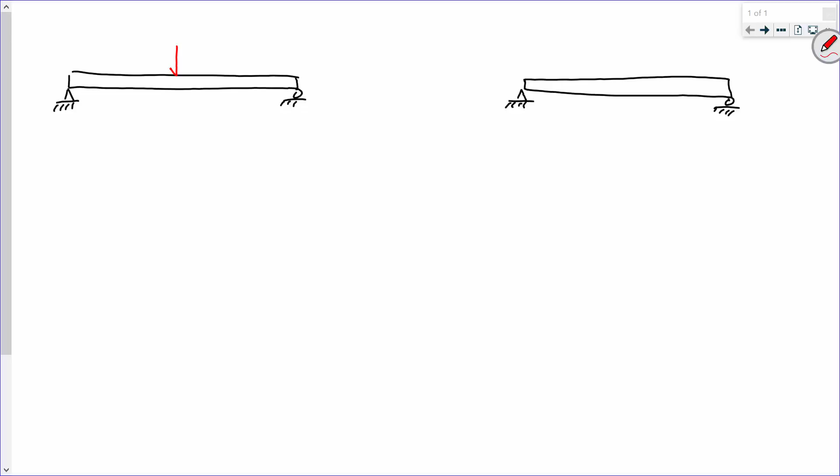Now I'm going to do this really basically. Okay, so I'm going to look at 2 different beams. Now this has nothing to do with the specific homework assignment, but I just want to make a point. All right, so I got a beam over here, I got a beam over here. All right, now here's what we've got. Okay, now let's say we have, let's make up some numbers. Okay, let's say we have a 40 kip load.

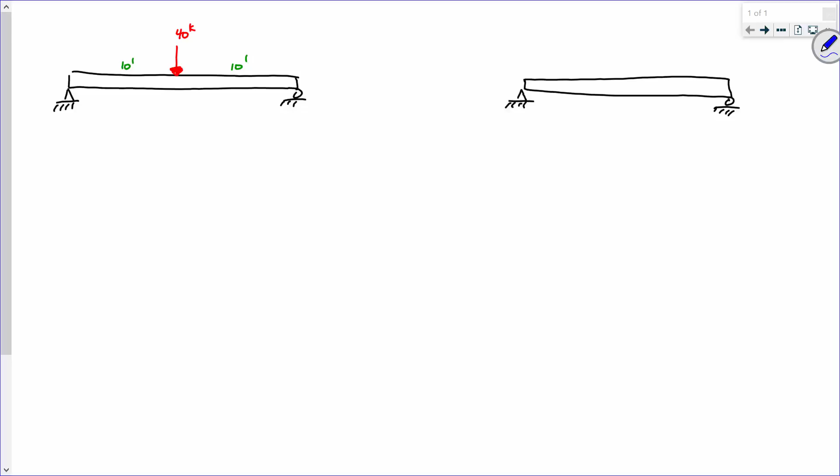We're going off, we're getting a handle on this conceptually. All right, let's say we have a 40 kip load at midspan. Okay, now let's put some dimensions on this. Let's say that this is 10 feet and this is 10 feet. Okay, so help me out with this, what are the reactions over here? 20 kips and 20 kips, right?

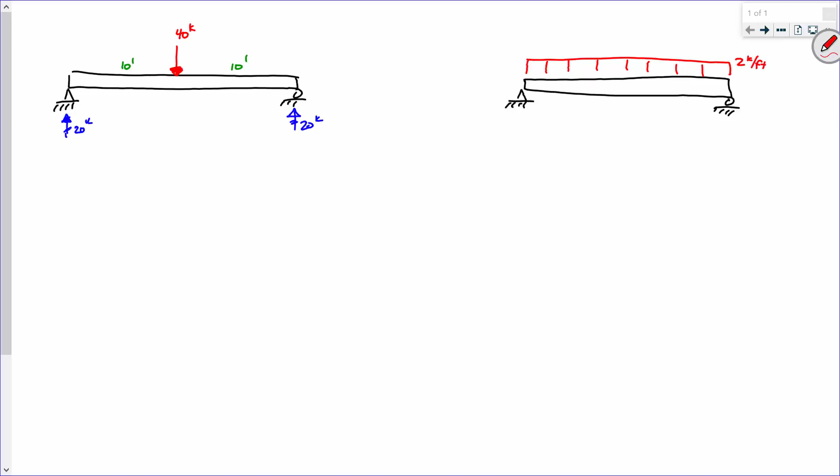Simple, right? Now what a lot of people are doing on the homework assignment is they're saying, well that's not 40 kips. Well it's 40 kips, but it's over 20 feet, so why don't we turn that into 2 kips per foot? And a lot of people are doing that, they're saying 2 kips per foot. And I think probably the logic is that if that distance is 20 feet, that's 2 kips per foot over 20 foot, so we've got 40 kips, right? And a lot of people are thinking, well that's the same beam, right?

Well my response to that is no, no it is not. No, in all honesty, it's not statically equivalent. Okay, and here's why. Let's take a look at the beam on the left. Okay, so first thing that we would do is draw a shear diagram, right?

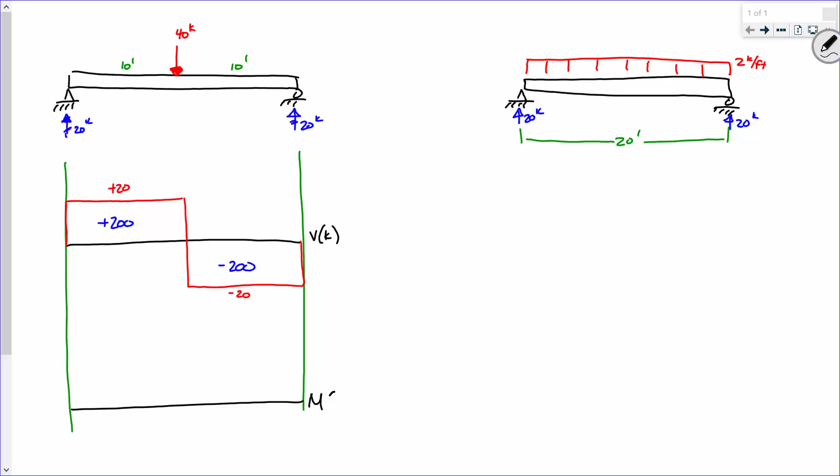So we would say, all right, let's go up 20, no change. Go down 40, so we're at negative 20. Go over and go up, so this is positive 20, this is minus 20. Everybody okay with that? That's the shear diagram. So the area under the curve, that is positive 200, that's minus 200. So the moment diagram looks like this: it goes up, and it goes down, and this is 200. Is everybody okay with that?

Okay, now here's what everybody's, I guess, having an issue with. They're looking at the two beams on the left and right, and they're thinking well they're the same. And in terms of the reactions, yeah they are, but for moments, not even close.

Okay, and here's why. Let's look at the shear diagram over here. Okay, so the shear diagram, I go up 20, but now I'm going down like that, right? So this is positive 20, and this is minus 20. So what's the area under this curve? Well it's 20 times 10, which is 200, divided by 2, that's 100, minus 100. So when I draw the moment diagram, it's different.

It looks like that, and it only goes up to 100. So my point is that if you take this and turn it into this, you are going to be significantly under-predicting the amount of moment, and incorrectly so. Now, that may not directly answer your question on homework 4, but here's what I'll say. Does this make sense, what I've got here? Okay, can I move on to the next panel to try and give you a little bit of clarity?

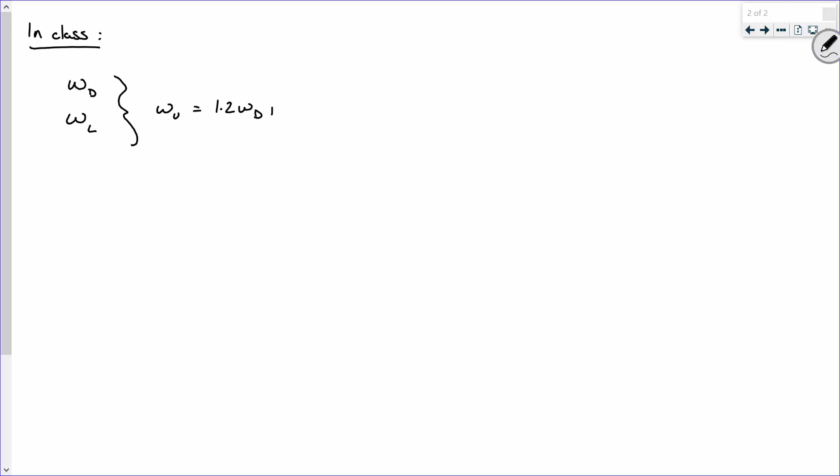So here's what we did in class. We would have a dead load and a live load, and then we said WU is 1.2 times the dead load plus 1.6 times the live load, and then MU is WUL squared over 8. That's what we did in class, right? Now let's be clear, the goal was to determine that. As long as we followed principles of statics and got MU, we were happy.

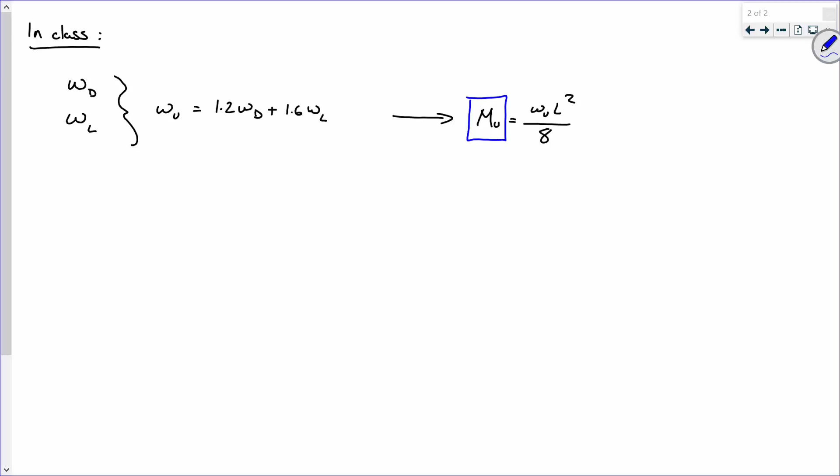Here's what I propose you could have also done, not only in class but on the homework as well. What if you say, I've got a dead load. Let's take that dead load and say the moment due to the dead load is, let's say it's simply supported, so it's WD L squared over 8.

And then down here we've got maybe something like some point loads instead of a distributed load. Take those point loads and however you need to do it—I'm being a little fast and loose with that because you all should be able to determine the bending moment in a beam due to some point loads, since you have the guides I provided, and you did structural analysis last semester, so you should be able to draw a moment diagram. You should be able to take that and compute some live load moment, and I'll let you all figure out what that is. But why don't you take these two and do this?

And just calculate MU that way. Treat each of them separately. Now let's be clear, you could have taken this approach and applied it up here, and it would have worked just fine. I could take the dead load and do moment due to dead load is WL squared over 8, and moment due to live load is WL squared over 8, then factor those, and it would have been the same answer.

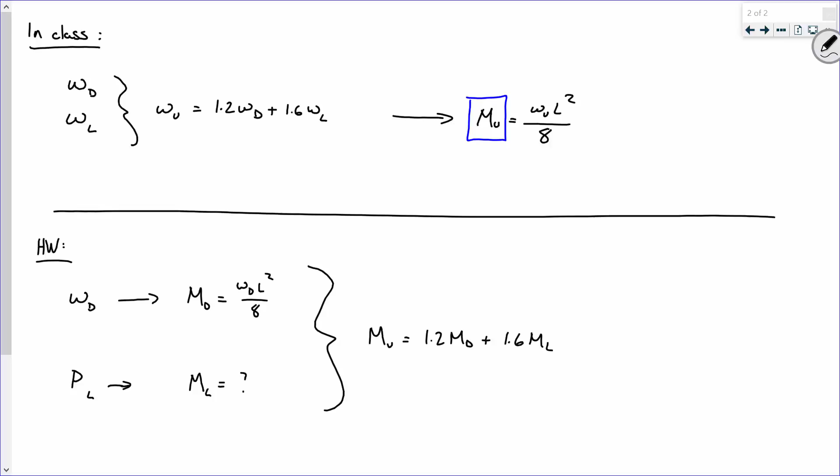You're more than welcome to. But we learned this on, I think it was homework 2. Those figures are fine, and there's nothing wrong with using them, but the thing you have to be aware of is this. Let me go back to this case. Now let's say, for instance, that over here on the right, this is my dead load, and over here on the left, this is my live load.

So these are two different cases of loading. Be clear, I cannot take the live load and turn it into another distributed load because it won't work out. But let me answer it—I think it's more clearly answerable on this. This one on the right is case 1 or figure 1, right? Which one's this over here? Figure what?

Okay, figure 1, where is maximum moment? At the midspan, right here in the middle, like 10 feet away. Okay, over here, where is maximum moment? Midspan. Okay, let me be clear on this.

I can take WL squared over 8 and PL over 4 and directly add them because they're at the same spot on the beam.

So to answer your question, my question to you would be, I would respond by asking this: on figure 9, is maximum moment also at midspan? Is it? It's not? Well, you tell me.

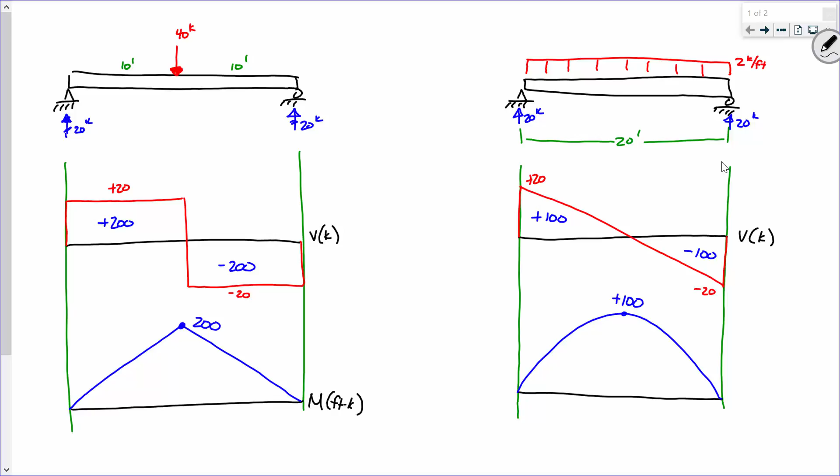Now, the answer is C in that scenario because it was right. Well, so did I.

You realize I haven't made the exam yet, right? So to heck with the FE exam, you have a celebration in here on Friday. So yeah, I'm going to remember that. It's his fault, everybody, right there, it's his fault.

Does everybody have any other questions on the homework? If you haven't started it, it's going to be a long assignment. There's a number of people in here that have already started to chip away at it, and I think they'll tell you, if you haven't even started it, it's going to be long. Am I right? So, monsters and Red Bulls are wonderful things. I guess that's all I'll say on that one.

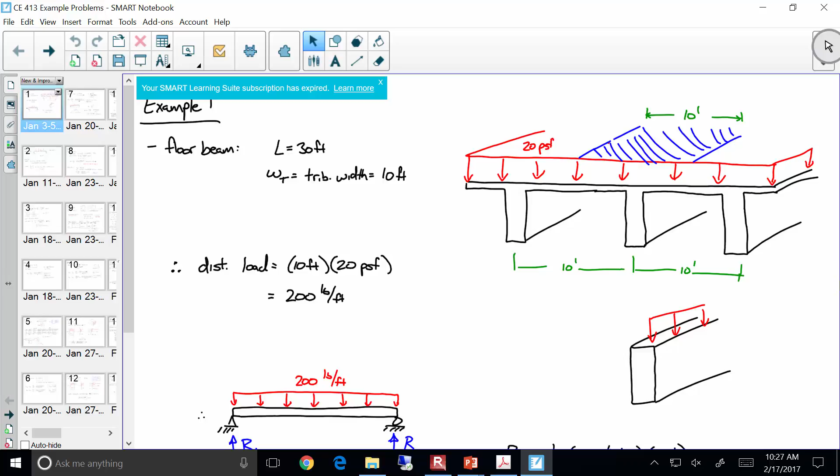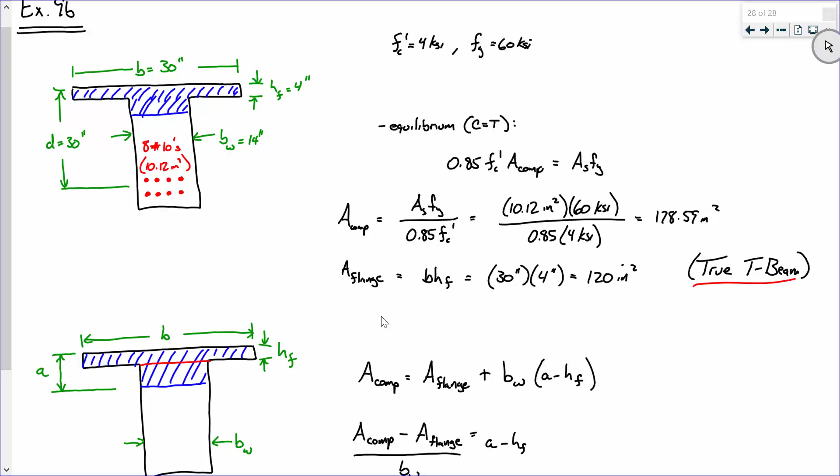So we derived a nifty little expression to compute the distance A, which might be worth starring or putting in your notes, or putting on a formula sheet, especially for homework, just so you have that handy. But ultimately, we got an A distance of 8.185.

So that should, if you think about it, verify our previous calcs. We got an A distance that was 8.185, and that A distance is larger, and this is important, than H sub F, because H sub F was the flange thickness, and that's only 4 inches. So the fact that we got an A distance larger than 4 inches validates what we did earlier. Does that make sense?

Now, in terms of moment capacity, this is going to be a little interesting, because think about it, we can do this one of two ways. We can either split this up into simple shapes, or we've got to compute the centroid of this. I'm going to come up with a way of determining moment capacity without doing the centroid. We'll see that as we get into it. Everybody all right with this so far?

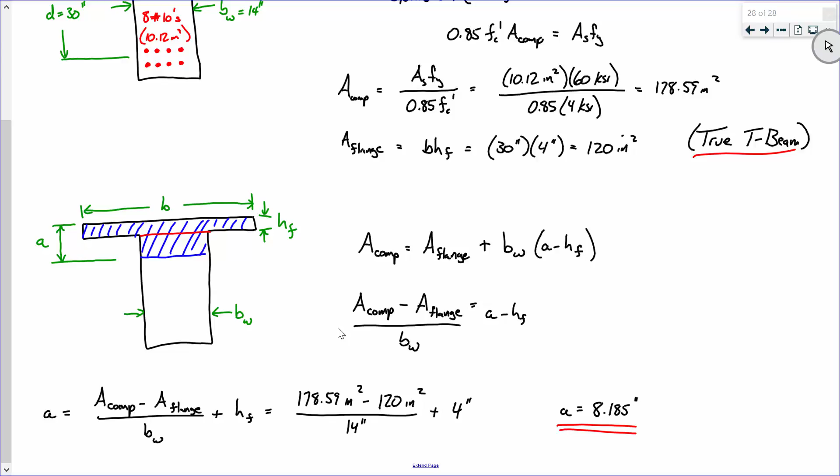Okay, now what I'm going to do right now is this. This is 9B. Okay, we have A, we have our stress block depth A.

Now that we've got that, one of the things that does not change is our computation of phi, our strength reduction factor. So I'm going to go ahead and do that now, just so I've got that out of the way. Remember, to compute phi, we need the strain in the steel, and to get the strain in the steel, we need the neutral axis depth. So I'm going to go ahead and do that now.

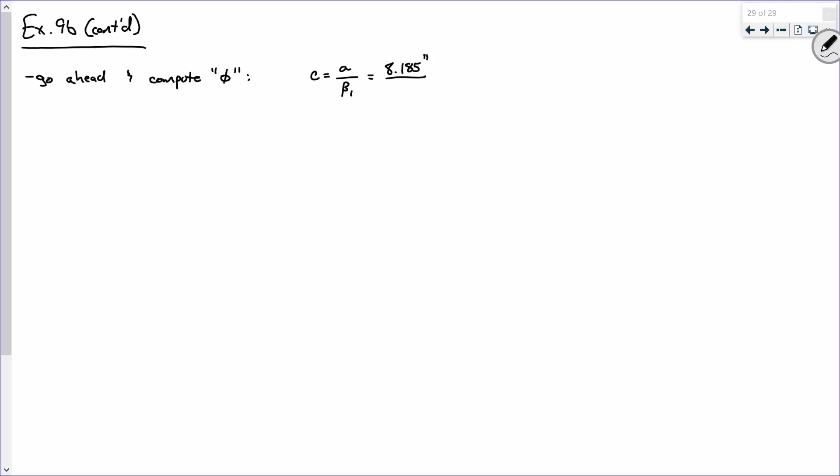Let's go ahead and compute phi. So we need to determine our neutral axis depth, which is just A divided by beta 1, which A is the 8.185 we got earlier. And what is beta 1 for 4 KSI concrete? 0.85. So 0.85, plug and chug, what does that come out to be?

9.63, or maybe 9.629. Just go to 3 decimals, keep it simple. I like to carry this to a few more decimal places because strain values can get kind of small. Now, how do we compute the strain?

There you go. And that doesn't change from T-beams to singly reinforced rectangular beams. The only time that strain calcs get a little funky is later on when we look at doubly reinforced shapes, because we've got to compute the strain not only in the tensile steel, but the strain

in the compression steel as well. Okay, so 0.003 times, what's the D distance for this one? There we go. Minus 9.629.

.00635. So what does that give us now? What's the value that we compare it to for phi?

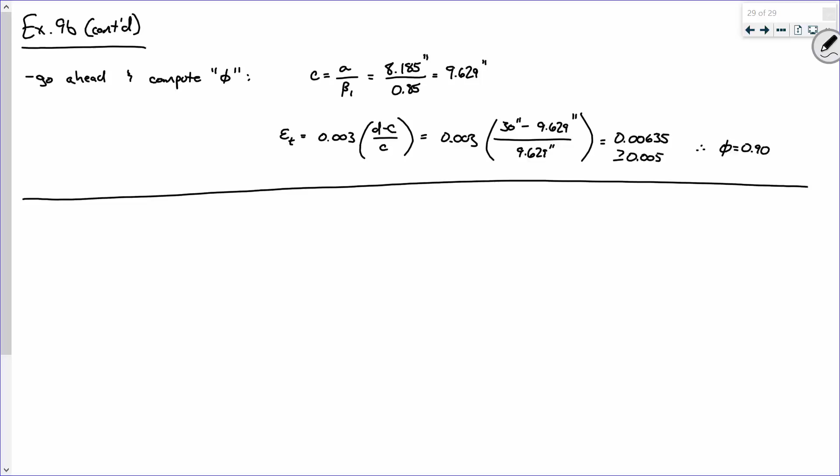All right, now let's look at this nominal moment capacity. Now this is kind of important. When we did nominal moment capacity before, we used a pretty fundamental relationship for moments, right? We said that to compute a moment, just in general, you need two things: you need a force and you need a distance, okay?

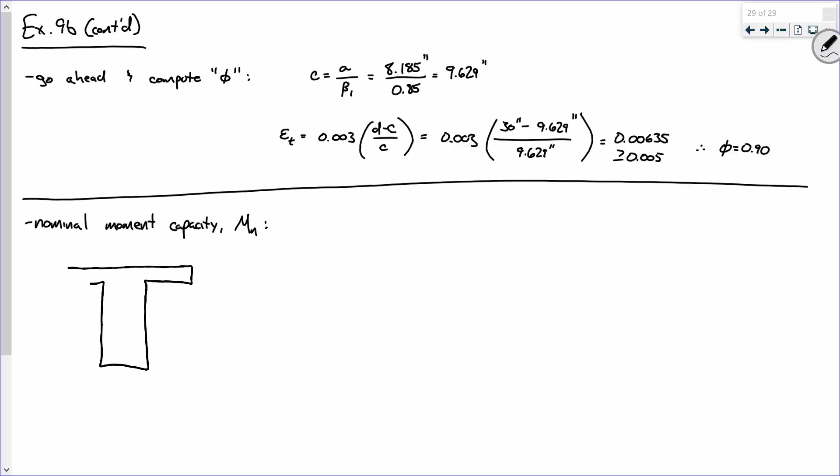So let's look at our beam, okay? So we have a beam that looks something like this. We have a stress block that looks something like this. And we have some steel down here. I don't remember how many bars it is, but it really doesn't matter. All right, sound good? Okay.

Now, when we did our moment capacity, we said that the moment capacity was a force times a moment arm. Now, first off, let's talk about the force. Did it really matter which force that we used before? Why?

Well, we didn't assume them to be equal. We found the distance so that they were equal. So we basically computed our moment based off of this relationship, and it didn't matter which force that we used because they were equal. Now, that was advantageous when we were looking at just a rectangular stress block and steel. We don't have that here. The geometry is a little more complicated. So ultimately, we need to account for the moment generated by this, okay?

So this is how I'm going to handle that, okay? I'm going to say that the moment generated by this is going to be the sum of the following two things. So bear with me.

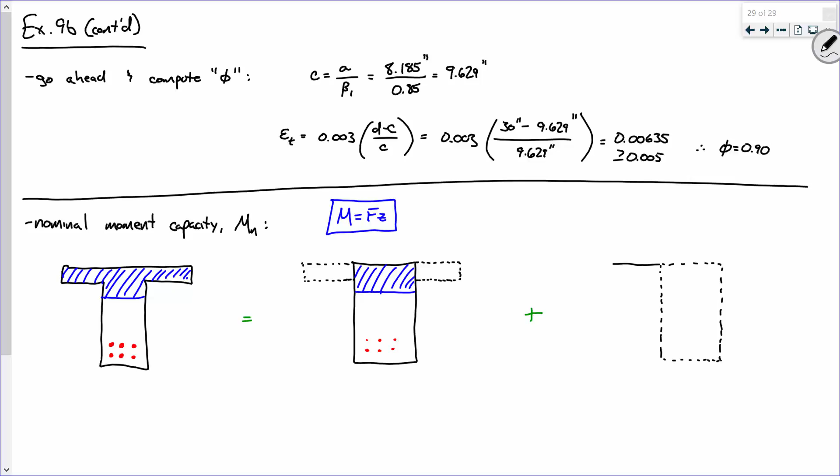So let me draw this out and I'll sort of explain what's going on. And then plus the moment from this. Bear with me. Okay, so I propose that to determine the moment generated by this stress block, it is the moment generated by this plus the moment generated by this. Just split it up into simple shapes. Okay? Everybody all right with that?

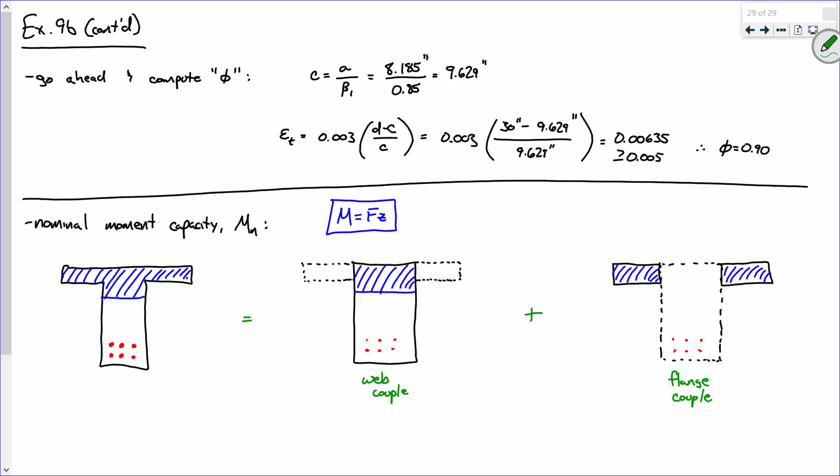Now, I've done this for a very specific reason. I'm going to call this, remember that term force-couple relationship? That's essentially what we're doing. So I'm essentially summing moments when I do this. I'm summing them from the steel. So I'm going to say force times distance, force times distance. I'm going to call this one over here in the middle the web couple. And I'm going to call this the flange couple, all right? Is everybody all right with this terminology?

Okay, now, so for each of these couples, I'm going to need a force, and I'm going to need a moment arm. Okay, so let's start off with the forces. Now let me put some dimensions on this. What is this? Let's look at this. What is this dimension right here? No, okay, yeah, it's 14 inches, but I'm talking about symbolically.

What is it? BW. Then I'm going to try and derive some equations that I can use for other beams down the line. Now, what is this dimension right here? That's A, right? Everybody okay with this? So I want to look at computing the force inside this part right here. Now, is that compression or tension?

Compression, right? So I'm going to call this the compressive force for the web couple. All right, now help me out. First off, what's the area of this web couple right here? What's the area, or that force right there? I mean literally, what's the area? There we go.

ABW. Now what is the stress? Remember, a force is a stress times an area. What's the stress? It's concrete in compression. So what's the stress that we've been using? 0.85 FC prime. Okay, everybody all right with that?

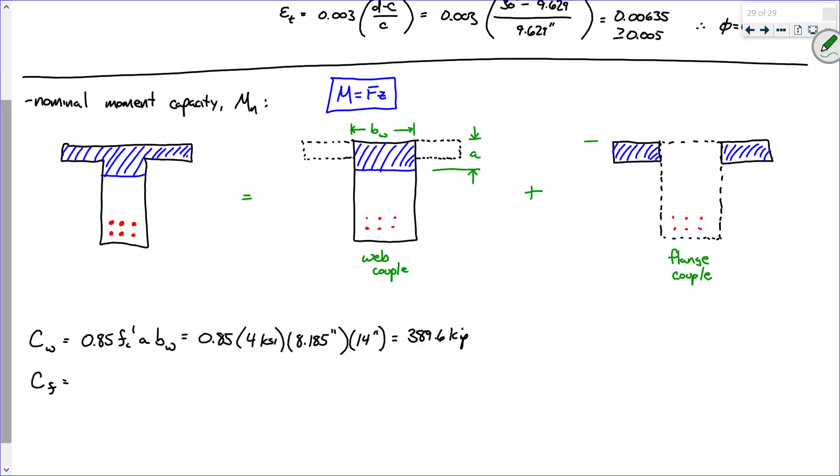Sound good? All right, so likewise we're going to compute a C sub F, a compression force for this flange. All right, now let's look at this. First off, what do we call that thickness? HF. And what do we call, now let's look at this, what do you think that distance is right there? There you go, B minus BW over 2, or 1/2 B minus BW. Everybody all right with that?

So I propose that the compressive force in that flange couple is going to be 0.85 FC prime times the thickness, now watch this, times that distance times 2. So I got a 1/2 and a 2, they're going to cancel out. So I propose it's 0.85 FC prime HF times B minus BW. Does that make sense?

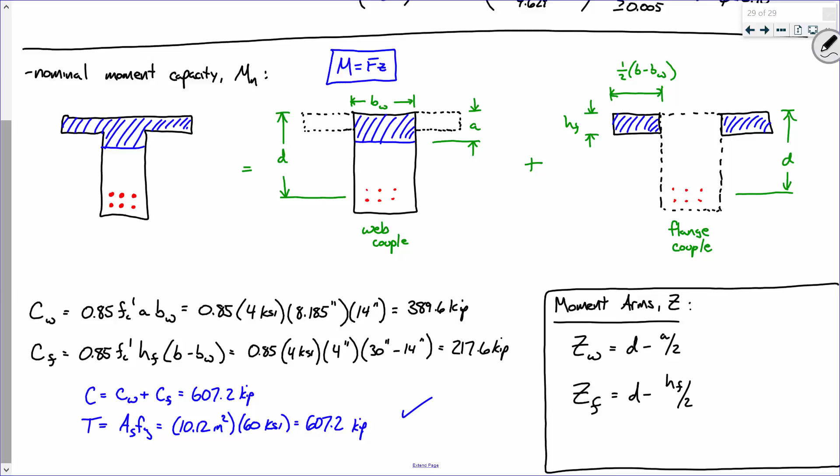Does that make sense? Everybody all right with that? So I propose the following, okay? First off, does everybody have everything here, or do I need to move on to another panel? You got this? Okay.

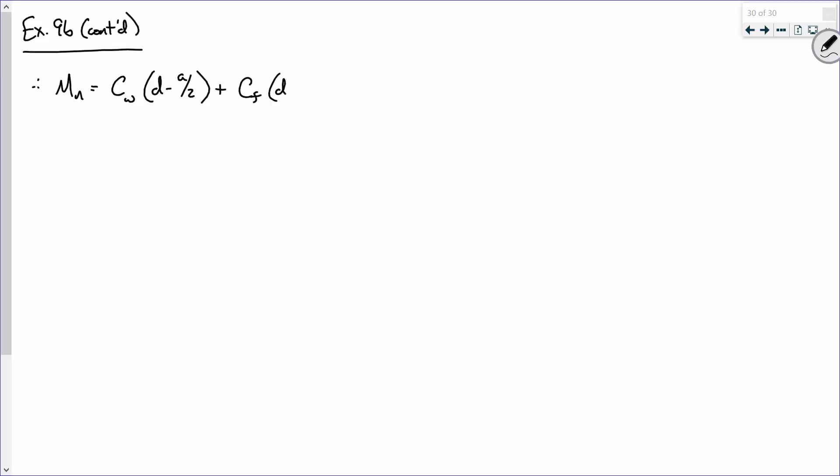I propose that, once I can write this out, Mn is calculated for a true T-beam as follows: CW times D minus A over 2, plus CF times D minus HF over 2. That make sense? Force times moment arm plus force times moment arm. Literally sum of moments, okay? All I'm doing, all right?

What makes it an ultimate capacity is the fact that I'm using literally maximum stresses. I'm using Fy for the steel, 0.85 Fc prime for the concrete. That's what makes it an ultimate capacity. But the actual mechanics of it is just force times distance.

So plug and chug. I've got C sub W, which is what? 389.6. D is what? 30 minus A over 2, which is, what's A? Plus C sub F, which is? And then it's 30 minus 4 over 2. Is that right? 4 over 2.

So what does MN come out to be if you do that calc? First, while some of you are crunching numbers in your calculator, what are the units? Inch kips. We still have kips, we still have inches, so cognizant of that.

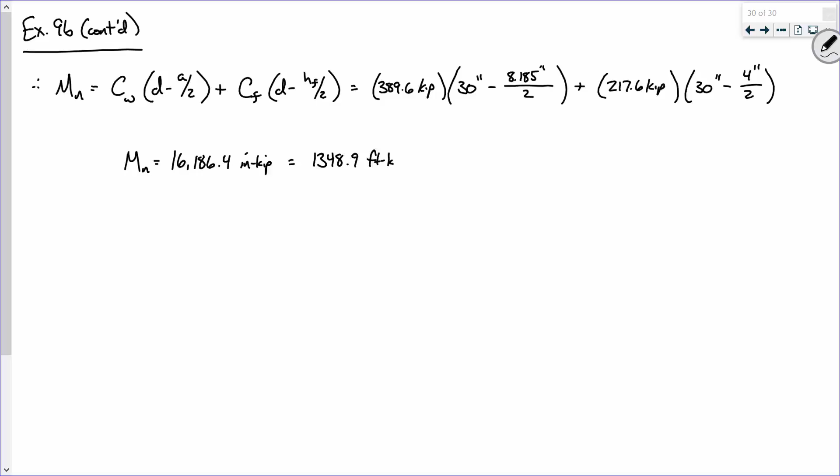16,186.4. Do I have a second on that? Yeah, for inch kips. Okay, so I heard a second. So what would that number be in foot kips? Now, is that the final answer?

There you go. And what is phi? 0.9. That's why we did it earlier. Went ahead and did that. So therefore, phi mn is 0.9 times 1348. Better than that.

Phi mn is what? 1214? 1213.97715. All right, rounded to the tenths place.

Is that an acceptable answer? All right. You're not happy about it? I'm sorry. This could cause a fail and kill a lot of people. This is where Grandma died. If that's the answer that you give in court, well, I didn't like the way Dr. Michelson rounded stuff. So.

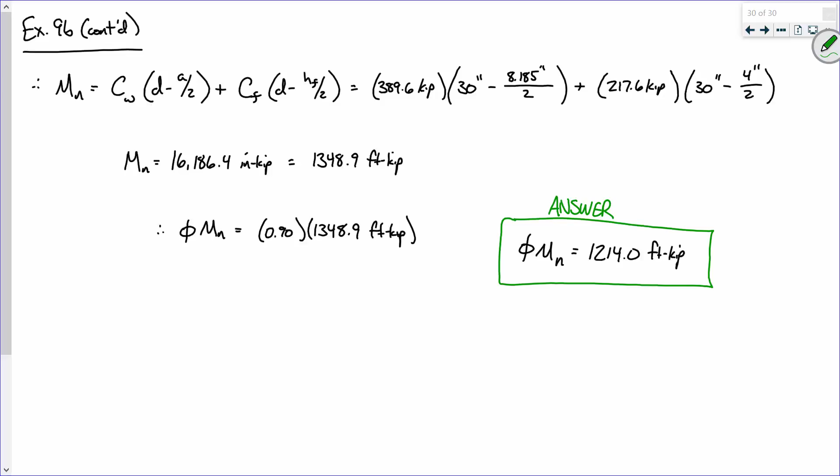Okay, let me show you at least a taste of things to come, and then we will call it. But the idea next is, how do we design a T-beam?

Well, first off, the only two things I'll say about design right now are the following. Number one, design of a T-beam is a lot like the design of a known cross-section. In other words, here's the idea: you can either use pre-manufactured forms so you already know what the size is, or you can design the beam independently, design the slab independently, and then go back to the combination of the beam and the slab and see if you can reduce the amount of rebar, and in many cases you can. So by and large, for the most part, you're going to know what the T-beam looks like, okay?

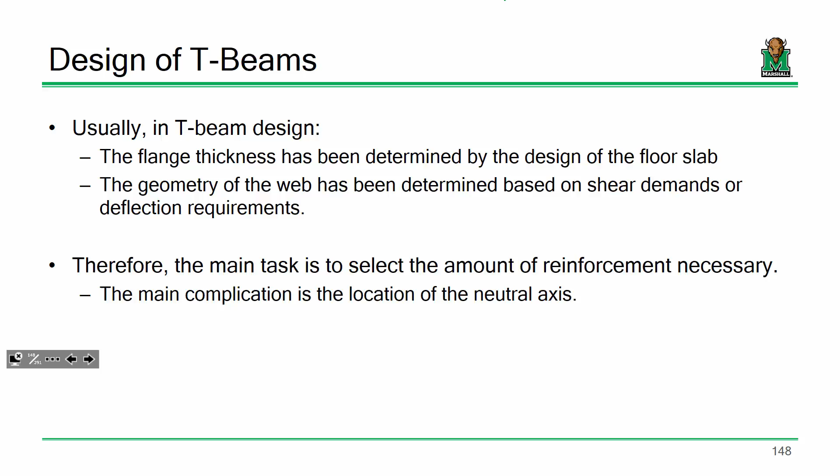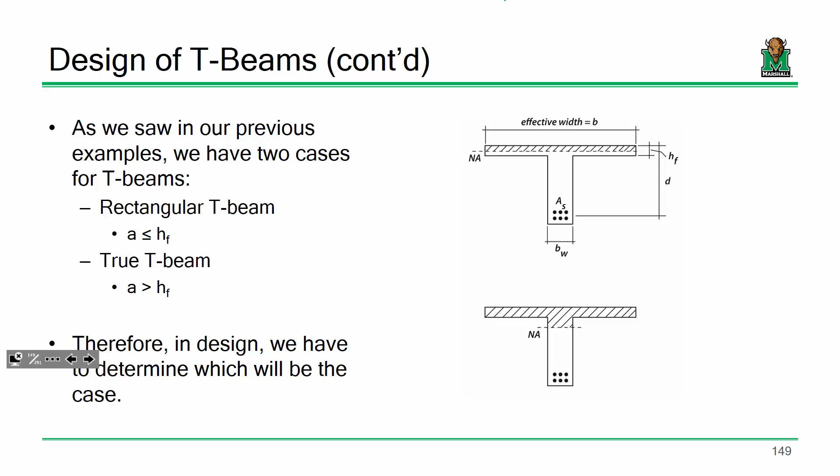So the main task is to determine the amount of reinforcement necessary. And the way that we do that is we have to distinguish between whether or not we are designing a rectangular T-beam or a true T-beam. Now, just to close it, if you are designing a rectangular T-beam, then the design is no different than what we did before, because it is, again, a group of steel and a rectangular stress block. However, if you are designing a true T-beam, it gets a little more complicated, okay?

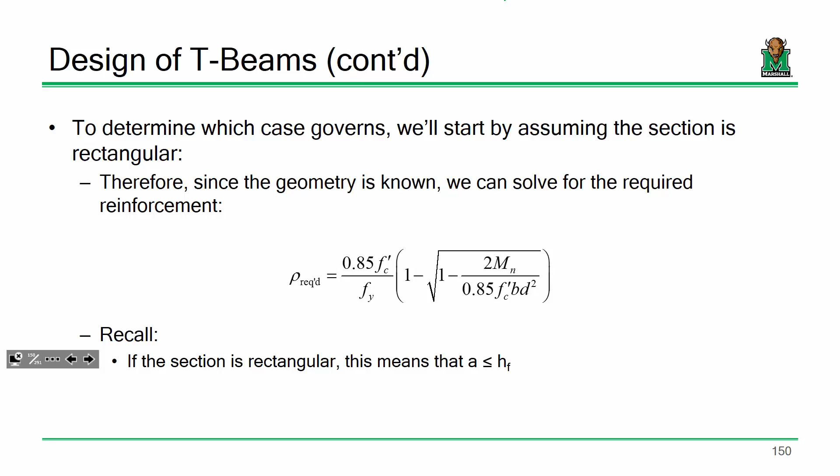What we end up doing for our design procedure is we start off simple. We start off assuming that the beam is rectangular. And if that works, we'll just calculate rho required, and that's it. Calculating rho required will then take that, back calculate the depth of our stress block to see whether or not our assumption was true. If it is, hey, it's rectangular.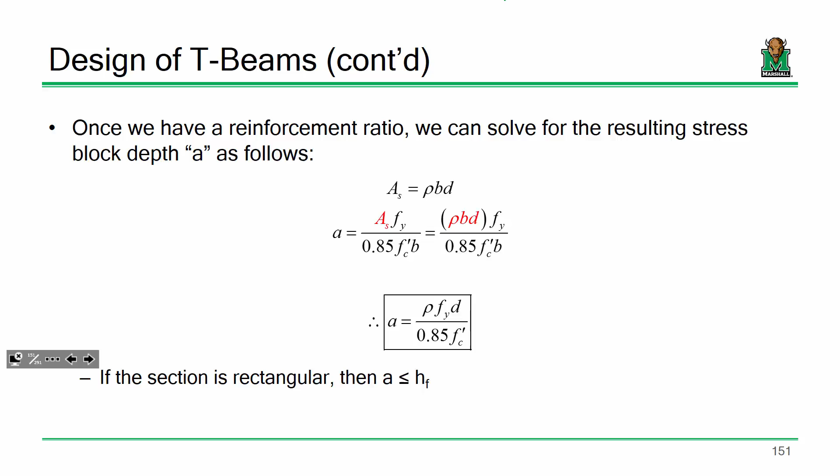If not, what we end up doing is this: we go back to this split that we made where we said, okay, we've got a flange couple and a web couple, and we literally treat each of them as if they're an independent beam. We figure out how much steel we need for this, how much steel we need for this, add it up, and then that's the amount of steel that we pick. That's basically it. It's a longer step-by-step process, but it really requires you to have a good understanding of the basics of 0.85 FC prime and As Fy. And if you've got that, you're good.

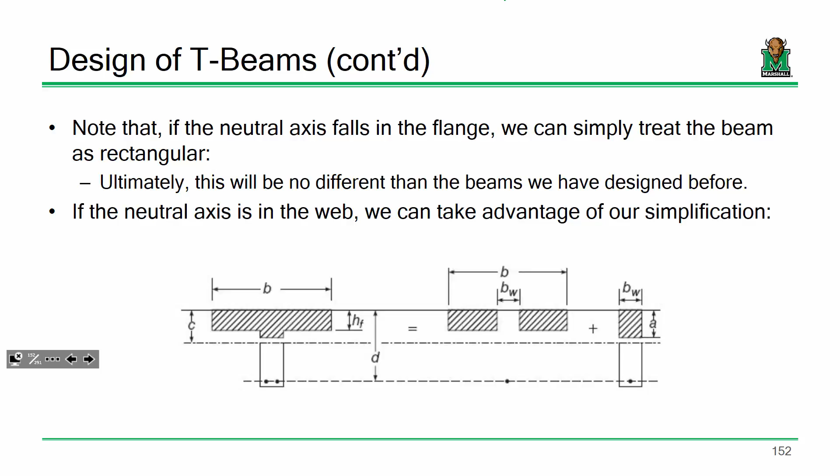Should I maybe move my car after the steel exam? Will they be graded this weekend? What's that? No, I drive a Lexus. All right, that's all I got. Y'all have a good weekend.